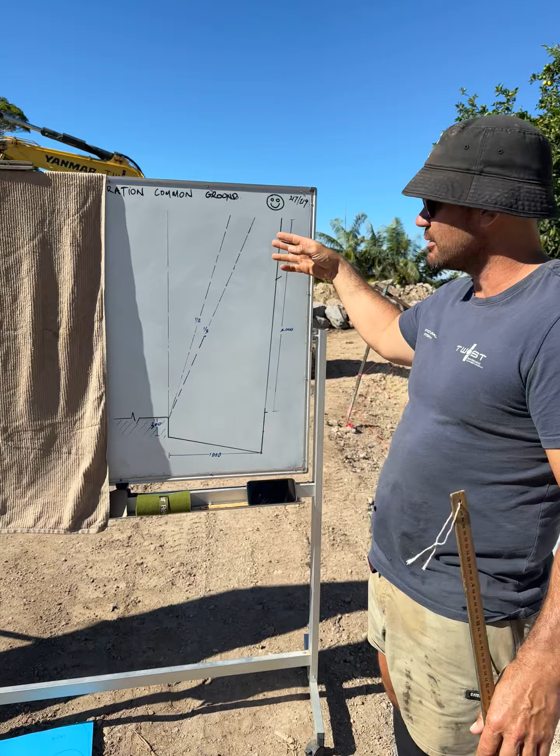Alright, here we have a scale drawing of a 2 metre wall, and I've got this green line which denotes centre line. This will give us some sort of scale on the angles that we're talking about - the principles of building a boulder wall.

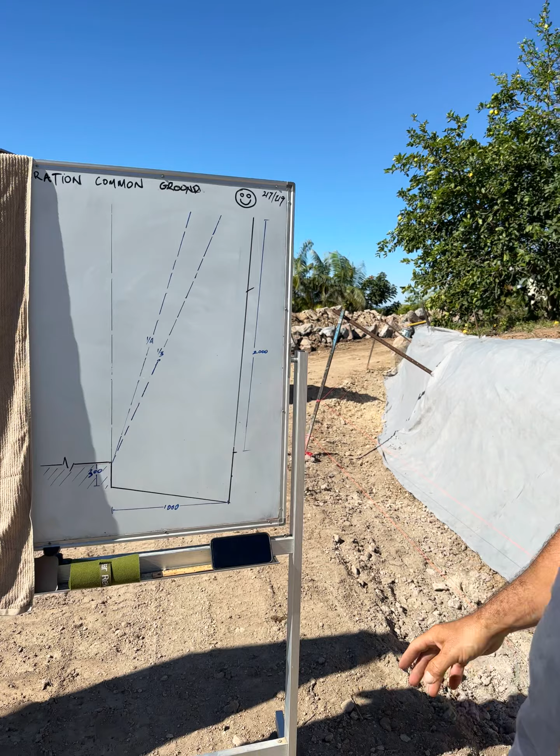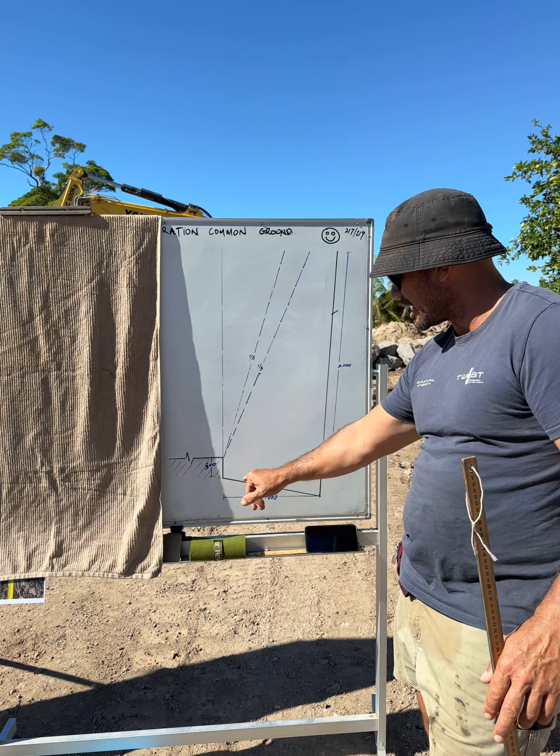Firstly, depending on the ground, we will dig our trench out, as per the engineer's spec. Once we dig the trench out, it'll look something like this as a side profile. We'll do the heel, or the back slope or rake, whatever you'd like to call it, and then that's ready to receive our rocks. Pretty simple.

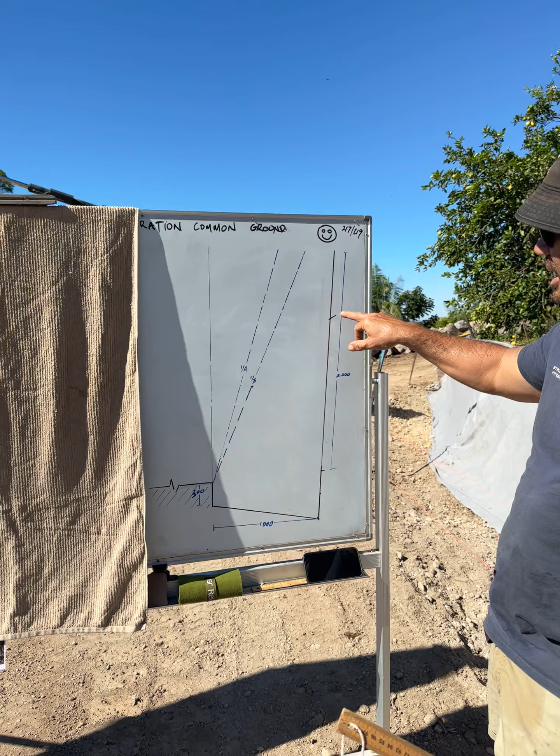Now, if we have a look at essentially the setup, this is our natural cut - that's the end of natural ground, and that's on a slight back slope.

We then go over to these rocks, through our pile. Now, as you can see, when we look through these rocks, there's no shapes that come in an acute angle. They're very erratic, lumps and bumps, essentially like big potatoes. These rocks are the ones that we've been using for the last decade on the coast, out of Hanson at Glasshouse.

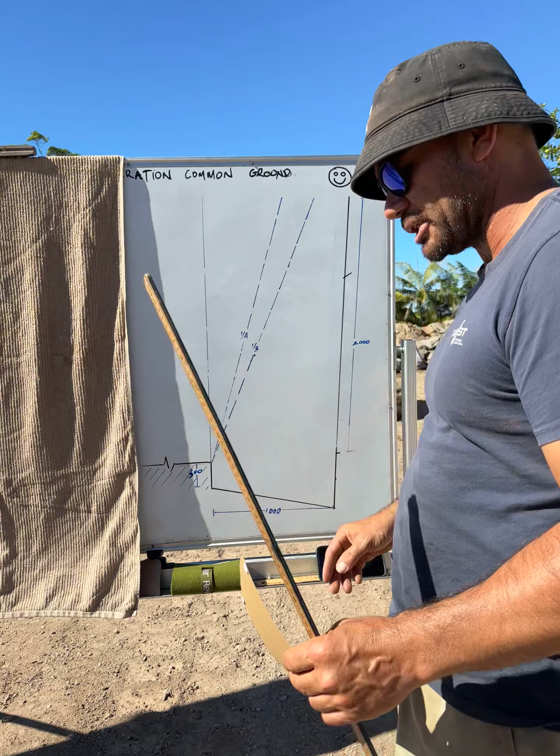Now, to get these into a formal, clean fashion which locks the wall in, we have to do a few things. In this instance, 50% of the height of the wall, we've got a metre footing. This rock here, an average rock, denotes around about 700 to 800 mil. So what we do with the digger at the back, we grab the rock and that comes down into our trench.

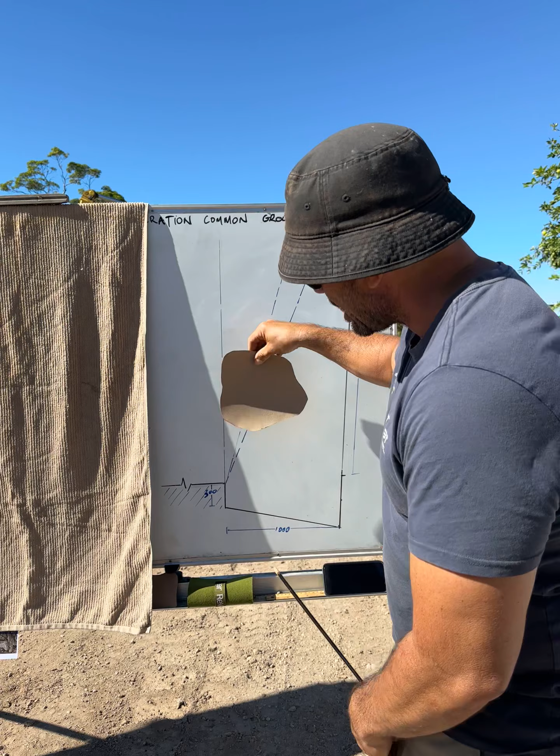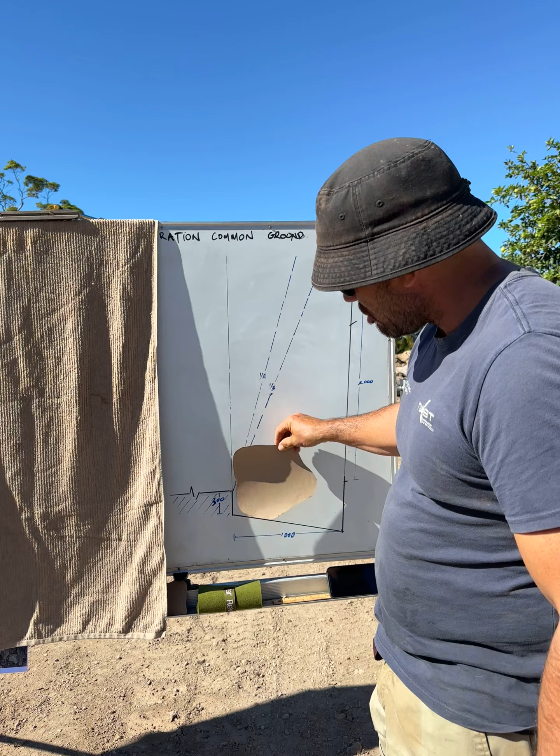Now, as you can see, we don't have the luxury of having these particular shapes. In fact, over the last 20 truckloads that we've had delivered on this job - that's right, 20 truckloads - we're doing about 400 squares here, there's no rocks that come shaped like this, so we need to work with what we get. So, let's say we have a rock, we put it in like so, and that's sitting quite nice.

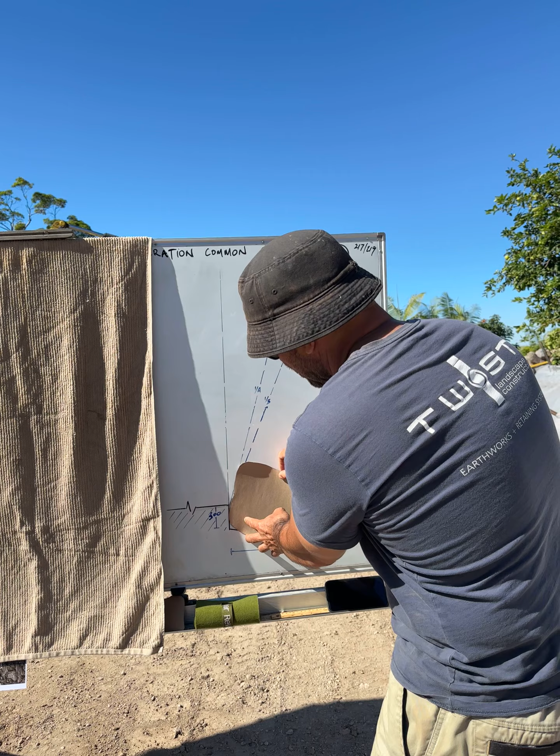And we've got some good embedment because of the shape of the rock, but essentially what we have to do then is kick that rock back to our 1 and 4. So once we kick that rock back to our 1 and 4, that allows us to get the engineered rake, whether it be 1 and 4 or 1 and 3.

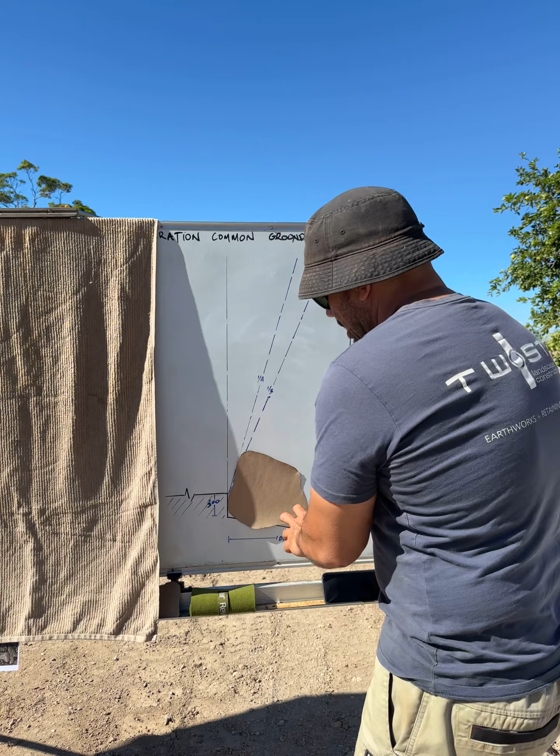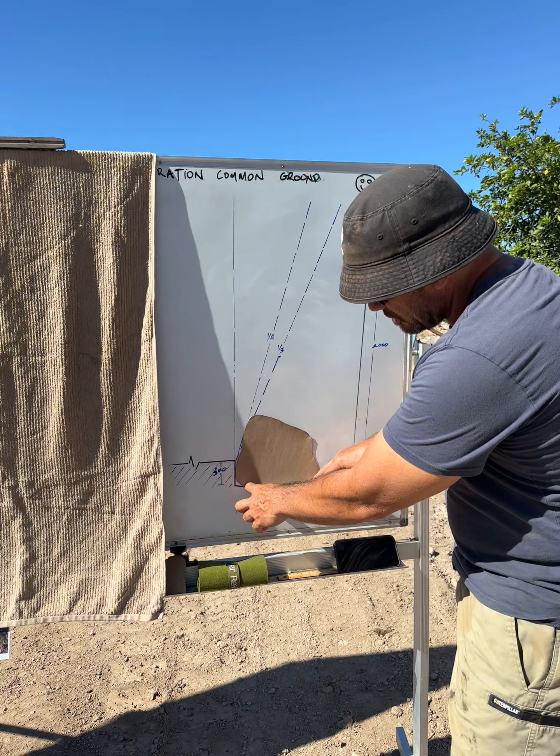70% of the time, when we get the vertical face and we tip that back on the 1 and 3 or the 1 and 4, the front edge of that rock will kick up. It's the law of physics, we can't just do it any other way. However, we've got this beautiful embedment on pretty much 80% of the rock at the desired spec.

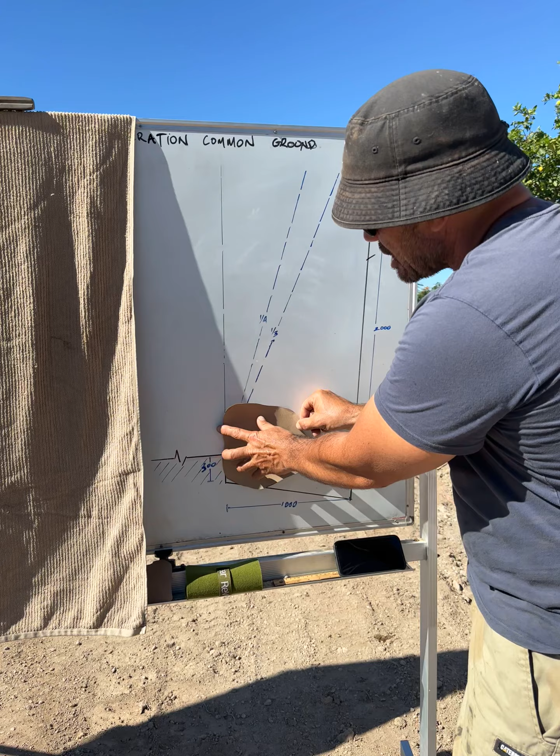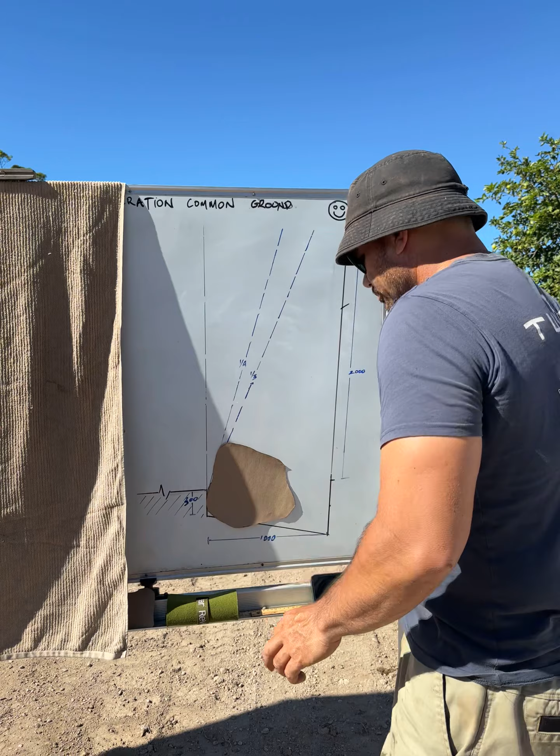So, once again, to reiterate, we grab our rock, we come into the trench, and then we go back to the specified back slope. In this case, we're going for the 1 and 4, and I'll explain that later. Now, once we've got our specified back slope on the rake of the wall, we've got this embedment here, and generally, as I said, because of the shapes of the rocks, they will always kick the front up. There's no other way to do it. We're building boulder walls, not block walls, not sandstone block walls - boulder walls.

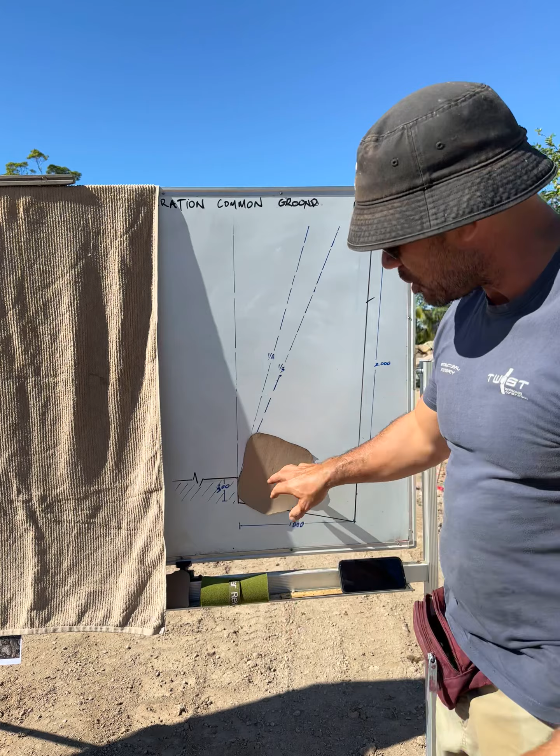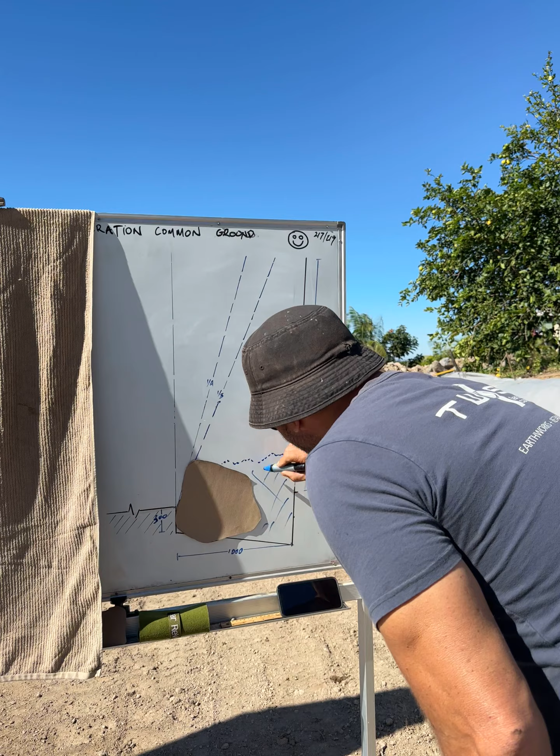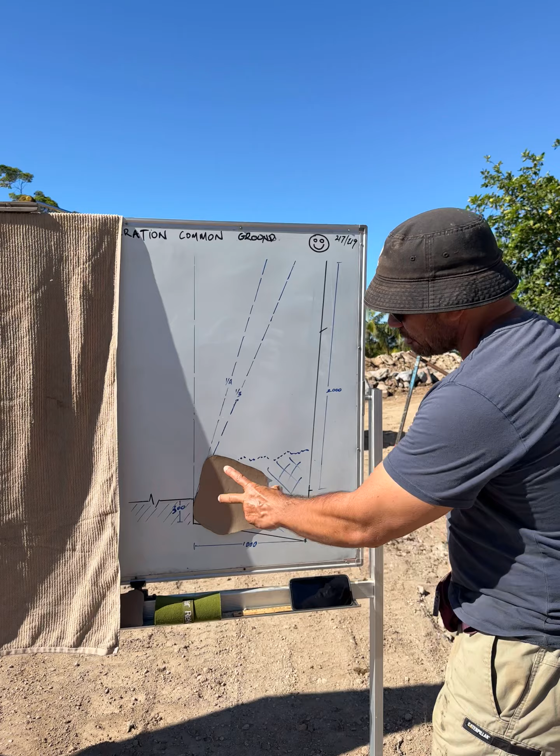What we then do is we load all this with 40-75. So let's say that this whole system here is all 40-75. We have our nice geocloth wrapped up as per this here. So the geocloth's wrapped up on top, and then we create this beautiful sealed system of rock, 40-75, geocloth, and a nice porous wall.

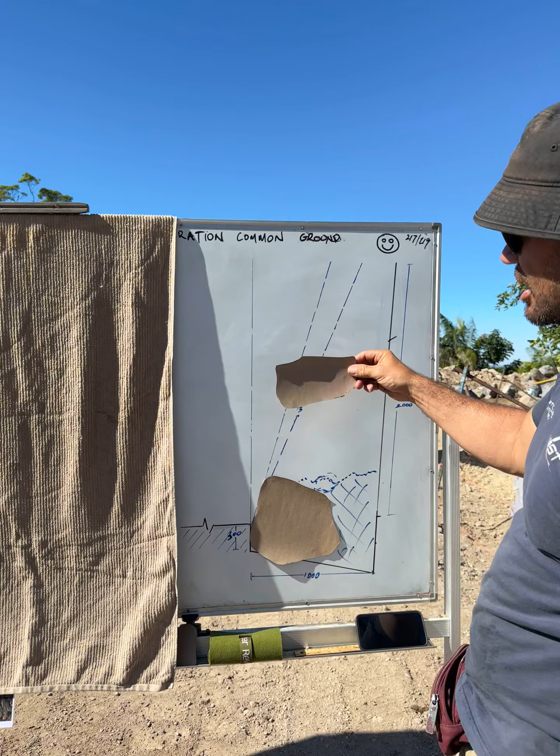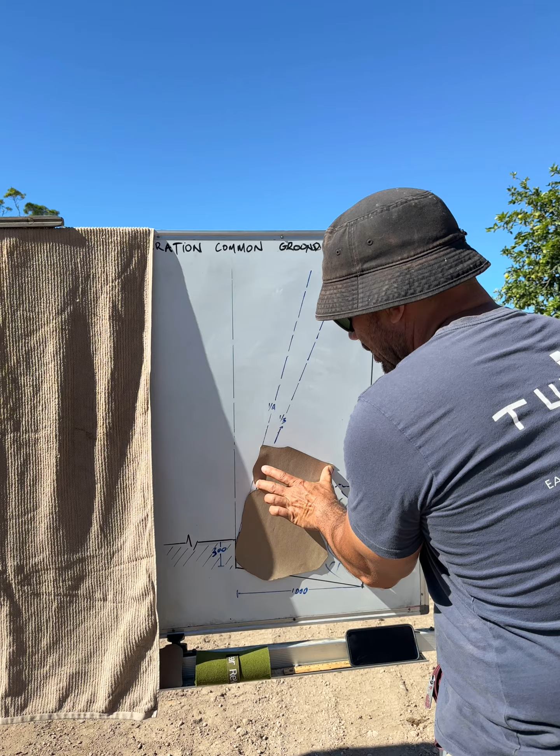We generally leave a pillow just above here, like so, of rock, and it enables us to nestle in the next rock. So once again, we come in and we're holding our rock up in the air, like so, and then we need to find that back slope, which is found with the string lines, and that enables us to get this nice face.

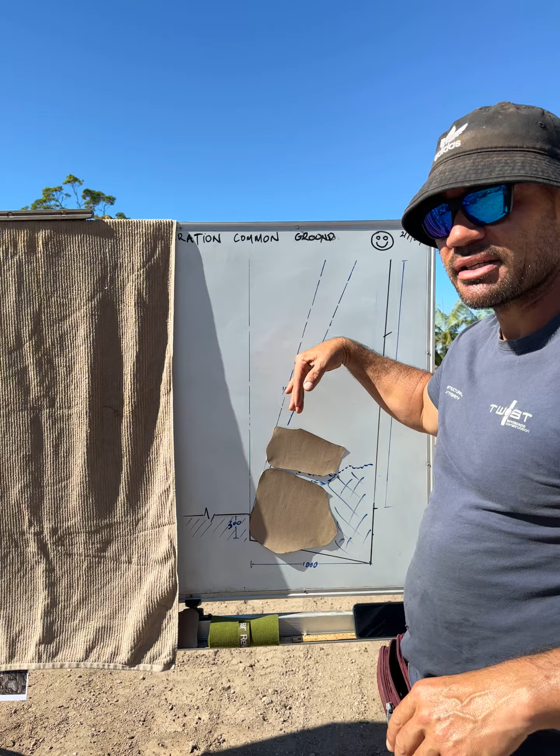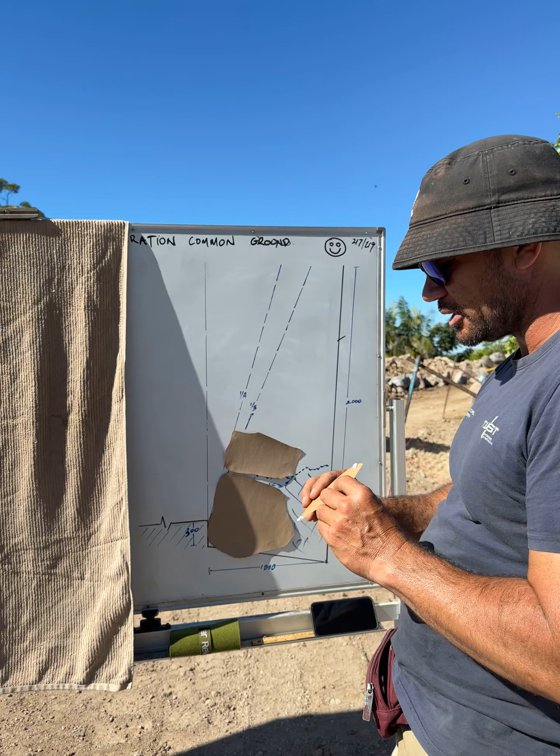Now, what I want to point out to you, and I'll talk about this in greater depth, the reason why we have always built our walls at 1 and 4 is quite simply if you have a look at this rock here, we've come in and put it on the 1 and 4 rake.

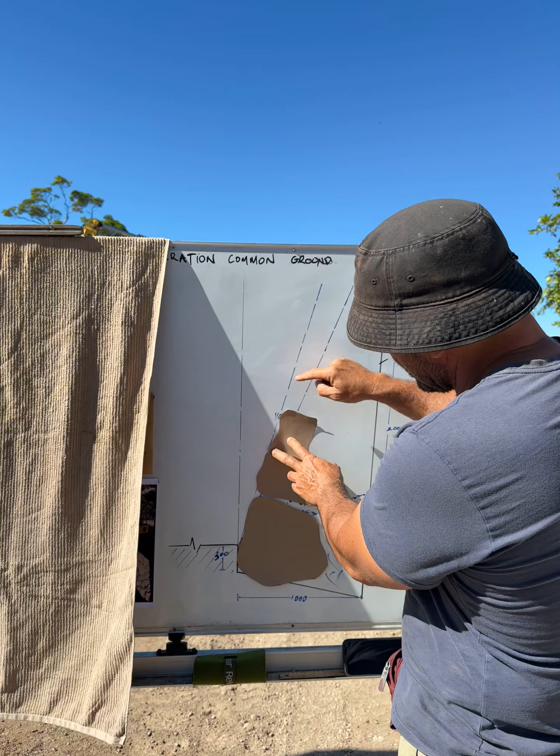Now let's give you an example of what that would look like if I went back to 1 and 3, all the way back here, okay? That's 1 and 3, all right?

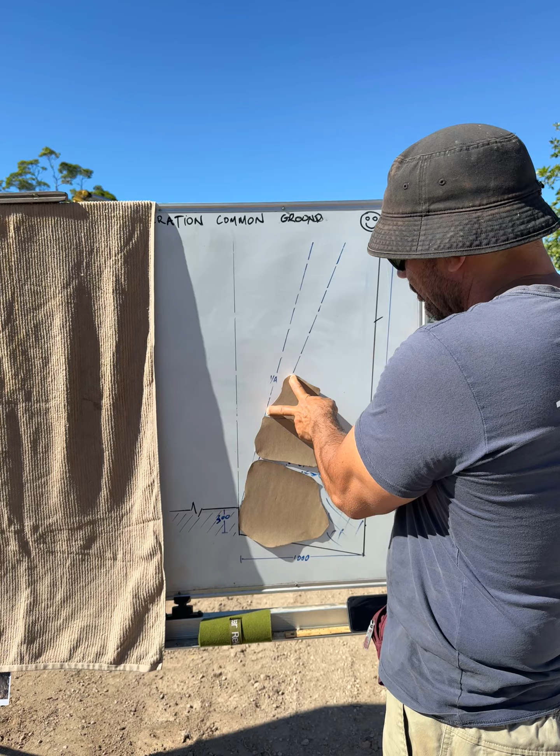The problem with this 1 and 3 rake is we simply have a top load over the gravel as we come back through. So by the time we get to the top, we've got a lot of the weight of this wall not centralized over the mass of the rocks themselves, okay?

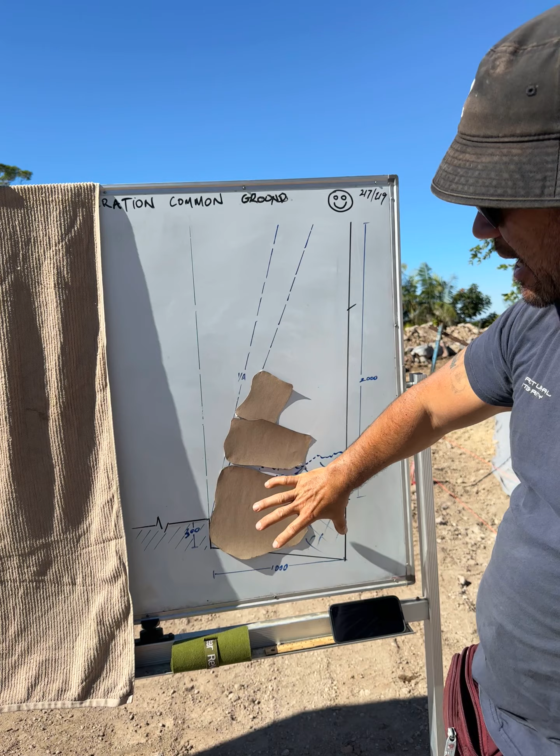When we come back to the 1 and 4, the rocks sit nicely on themselves. They don't want to kick forward. When we come back to the 1 and 3, we find the rocks wanting to kick forward, kick out like so.

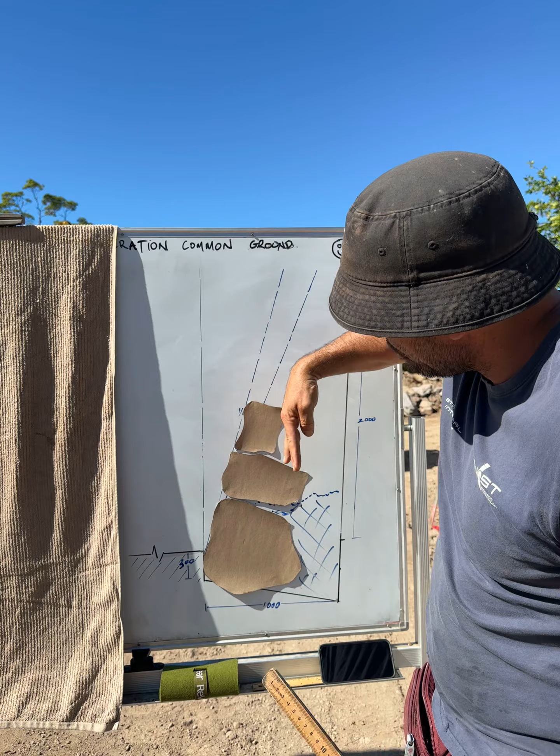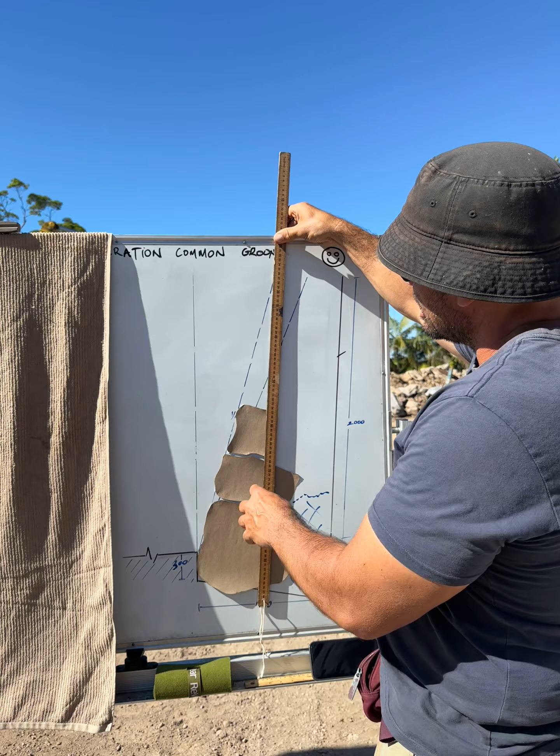It also enables us to bring the center of gravity of the wall straight through the middle of that structure. So they nestle in, and it allows us to bring that gravity or that load straight through the center of the structure.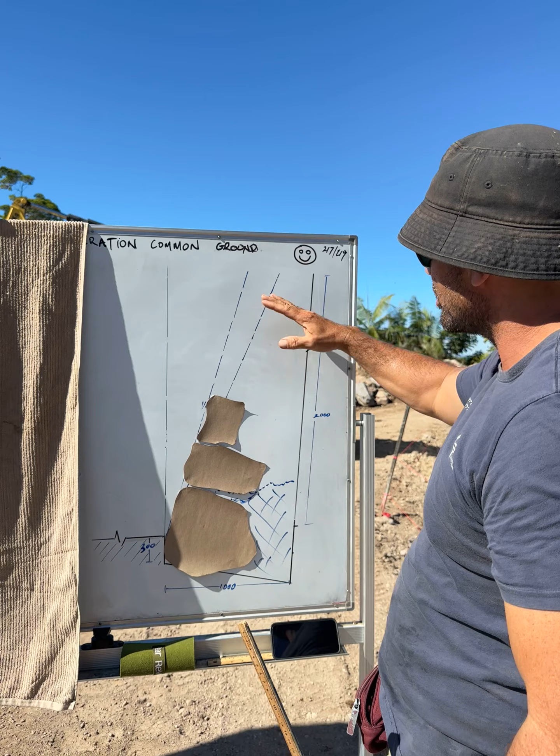Remembering that our natural ground is here, we'll build these rocks all the way to the top. This will be gravel all the way here to disperse some of that load, and then we can backfill. That means the major angle of repose or any surcharge is coming through this area here.

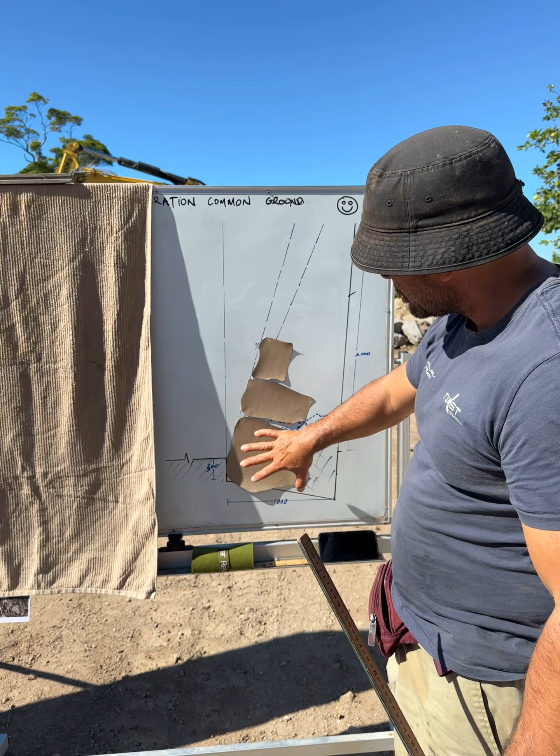So we've found with the 12,000 square meters of rock walls that we've done, that this works perfectly for the rocks to sit naturally on themselves.

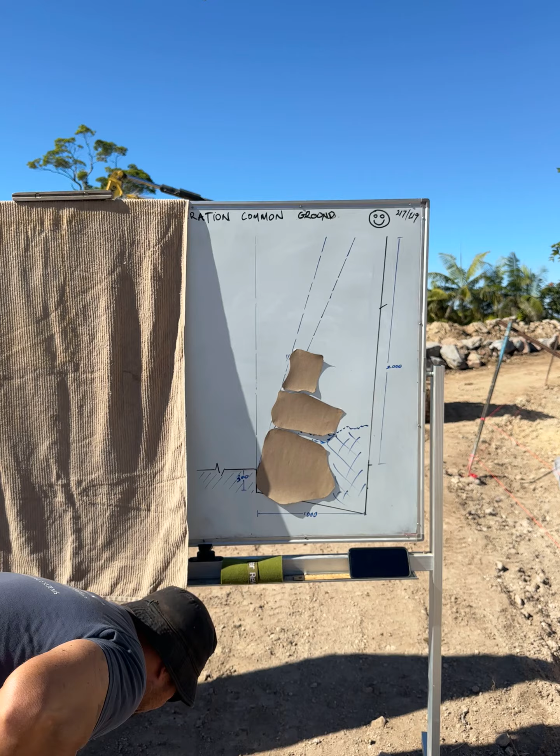Now, the other thing to remember when we're building these walls is we have a lot of machines. You've just got to be mindful that as these machines come in, this beautiful little natural ground that we have will get minced up.

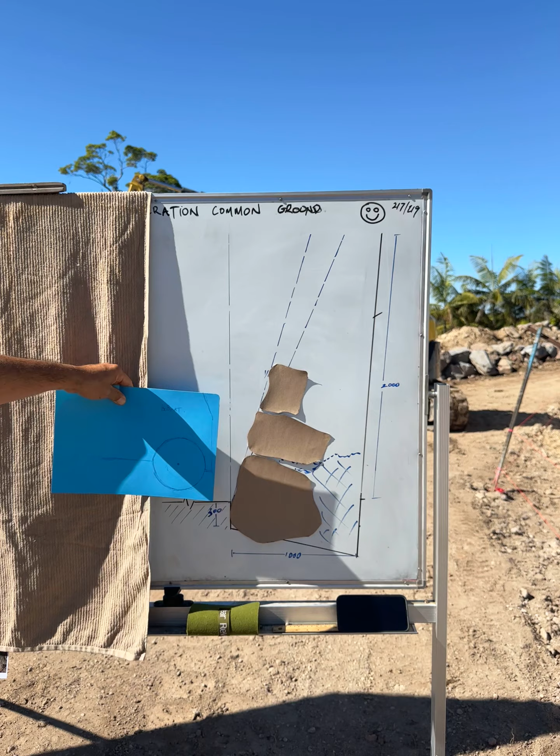So that's a scale drawing of a bobcat tyre, and he's coming in there feeding gravel over the back, and over the duration of the job, this is going to get minced up a bit, so it's hard to keep it as natural ground.

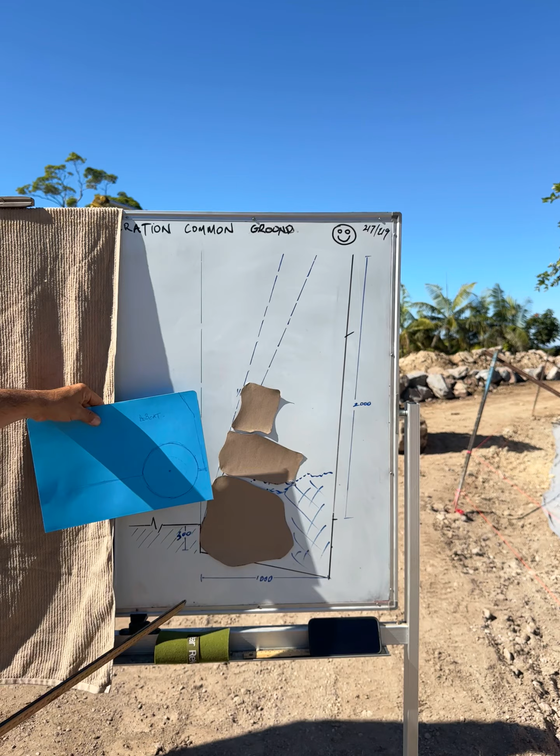It's literally impossible, all right. So as I said, that's coming in, working, putting the gravel over to the top.

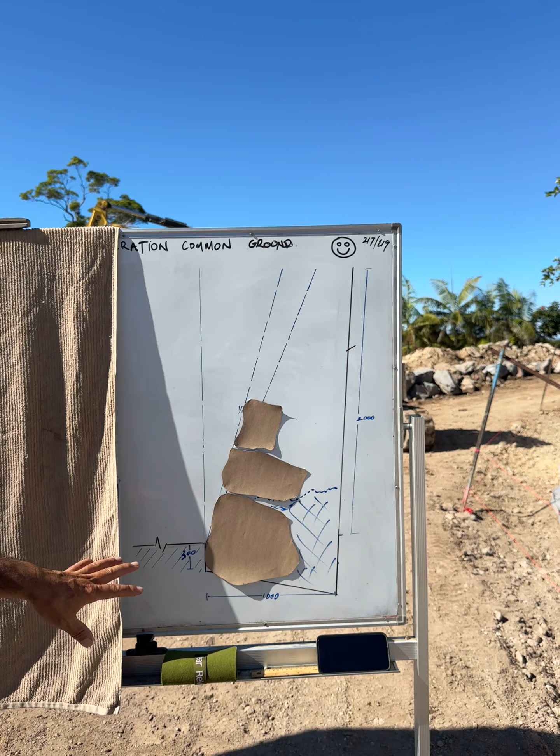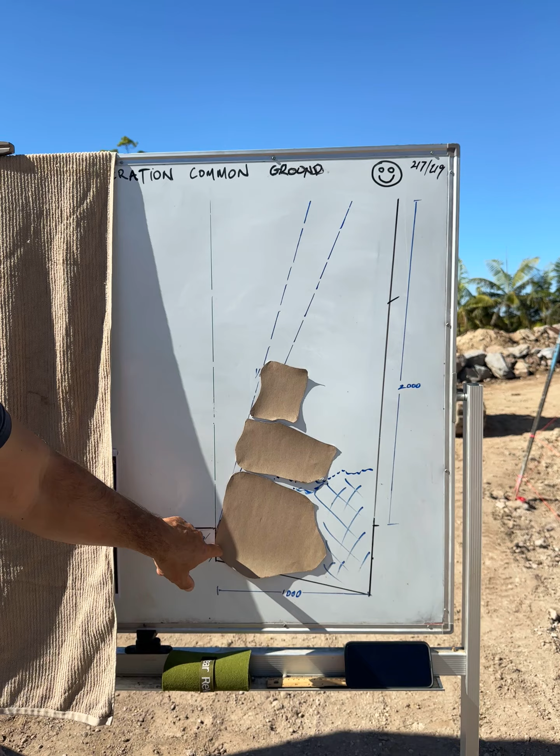Now, the main thing with the embedment is you potentially won't have the embedment 60% of the time on that front edge of the rock. But that's not the crucial thing to us. The most important thing is the main body of the rock.

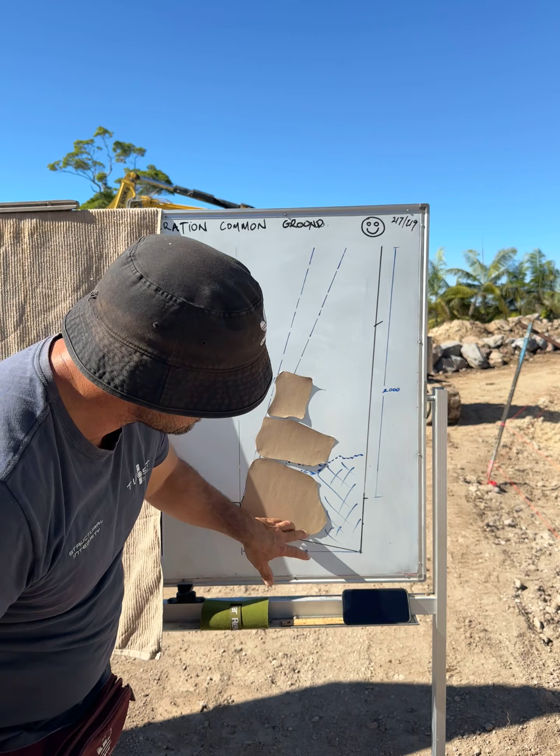So we call it the bum. Where the rock wants to sit naturally is nestled into this ground. If there's any undulation in that coming up, that gravel comes in, we tamper that down, and that locks the base course in. Remembering, we use the largest rocks available on the bottom, and then we scale up to the top.

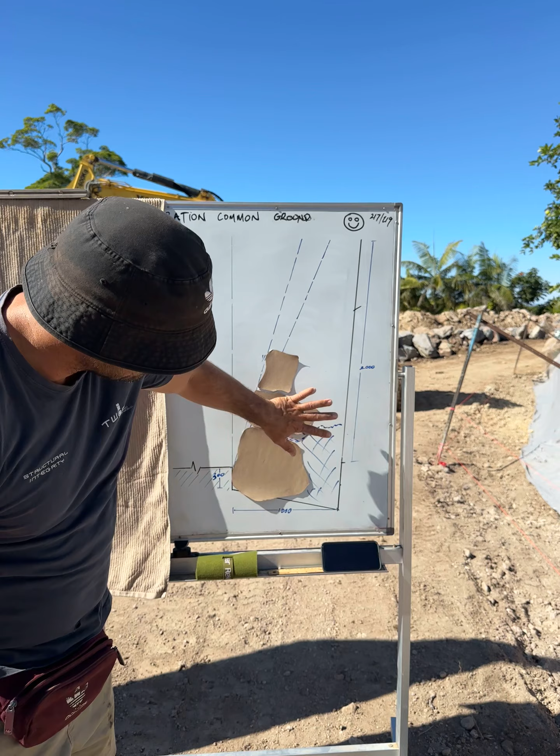So these big bundis go on the bottom, hence a gravity wall. And then that all locks in nicely. So that's the important thing about that.

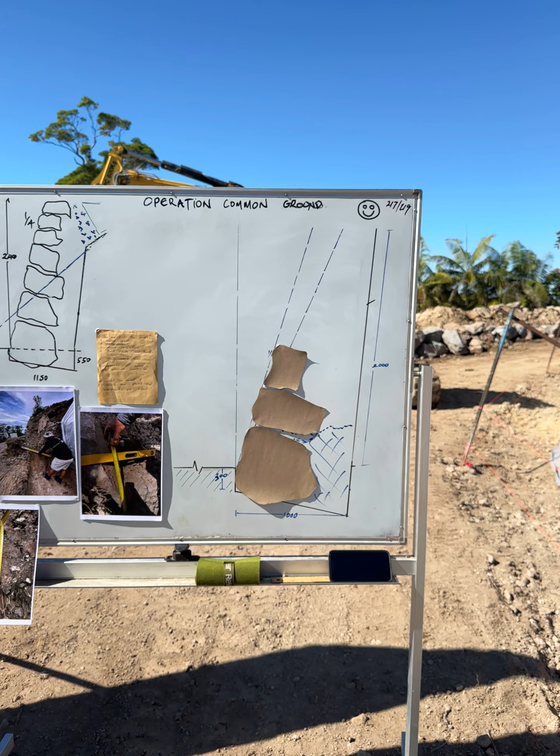Now, just talking about the embedment while we've got you. It's crucial that we have the appropriate embedment, because that displaces this load down through the planet, as opposed to everyone talking about this little kick here.

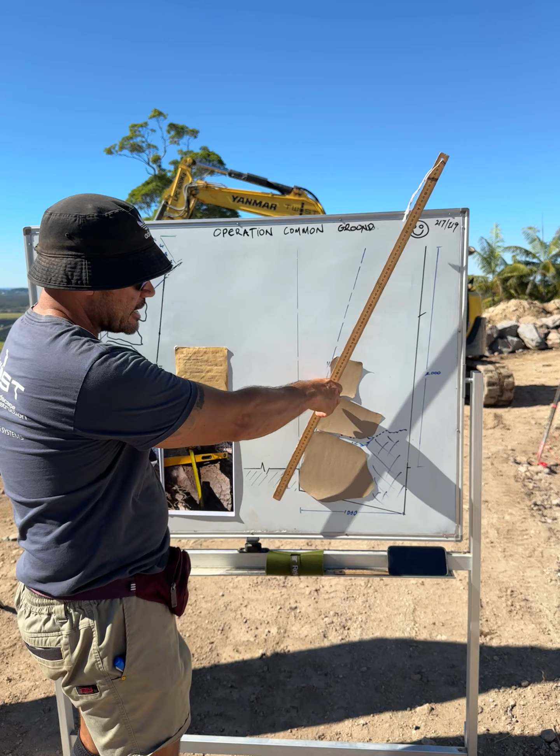If we have a look at the surcharge, that kick's actually coming closer through the center of the wall, hence why this width is important.

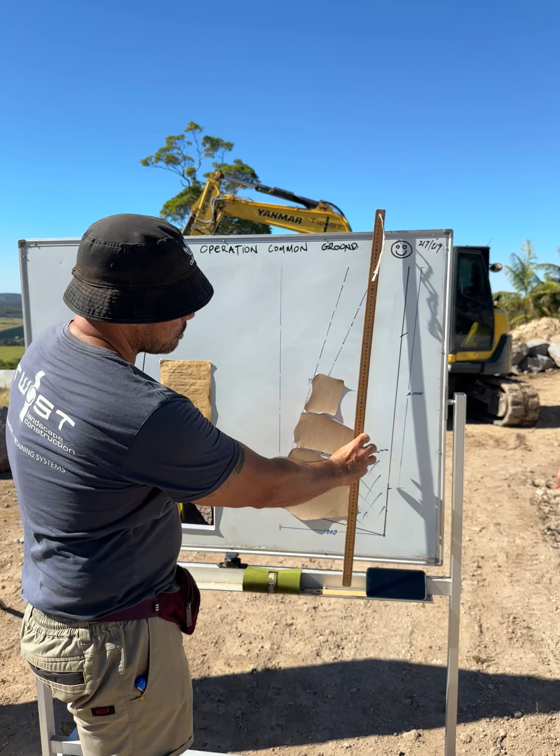This here, once we have this wall and that download central over that structure, all that weight wants to come through here. Hence why we're in a nice embedment and we're pushing back through the planet. We're pushing back through the planet.

9 times out of 10, we could expose this and this wall's still going to be secure purely because of this simple heel - that rake at 1 in 4.

Now here's a demonstration of that particular heel, which is actually still on site. As you can see, that rock is still on site.

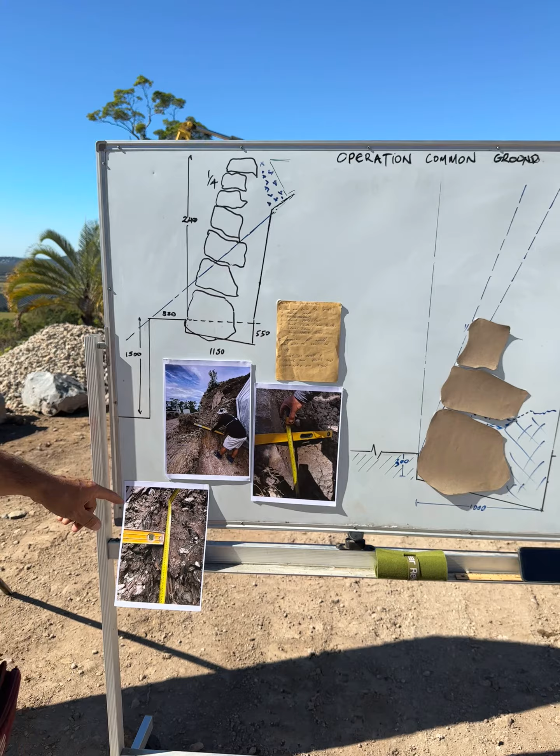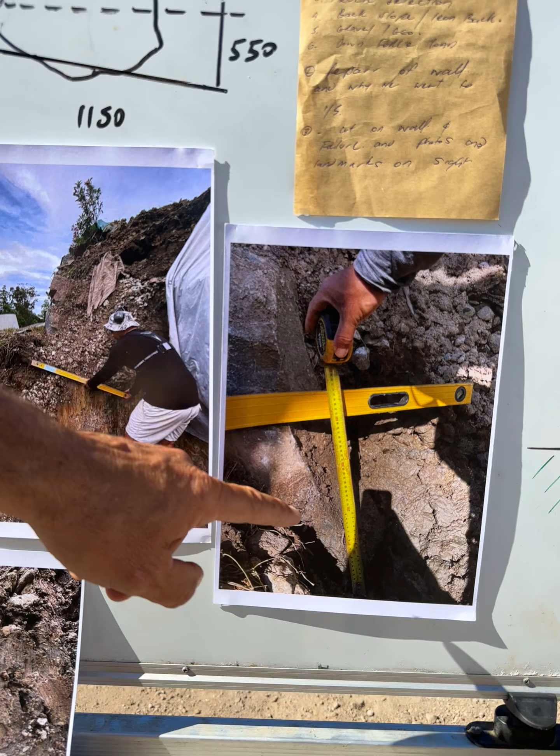This is natural ground level that was cut down. That's 900 at that point. We have about 370 mil from natural ground to the bottom of that rock, which is sitting in here.

Then we also have another 250 mil over the level, and that goes back another 200.

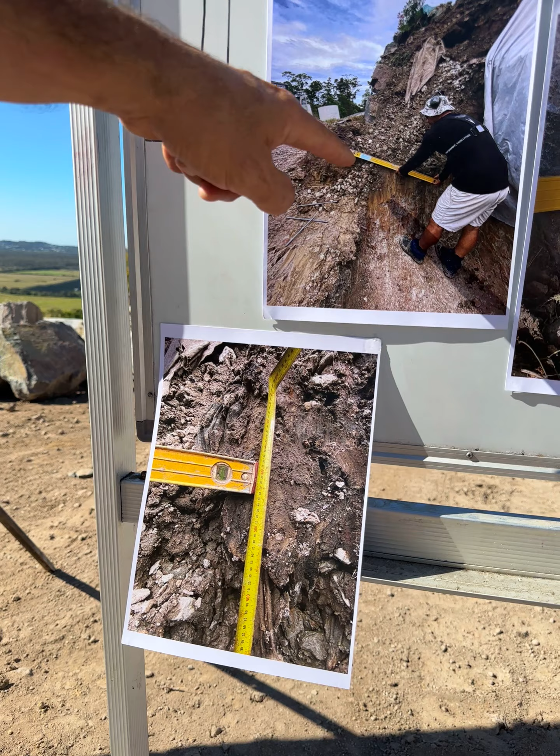So when I shot the screed from here to here, which we have a photo of, we've got a 600 embedment. 600 embedment, and this is exactly what we're talking about here.

Now that's a side profile. That's not a front profile of the rock, it's a side profile, which allows you to get some sort of grade of how we've dug that footing out.

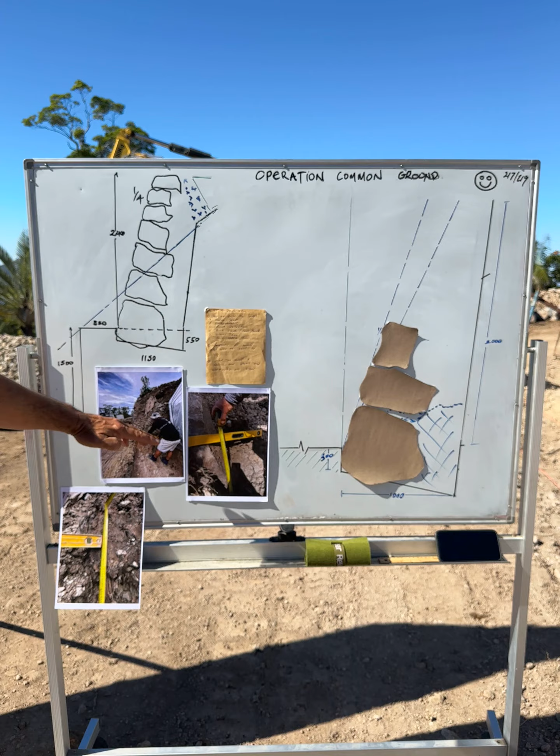And that there will be on a plane all the way through, because this was the deepest part of the wall. So that's important to realize when you have a look at the embedment.